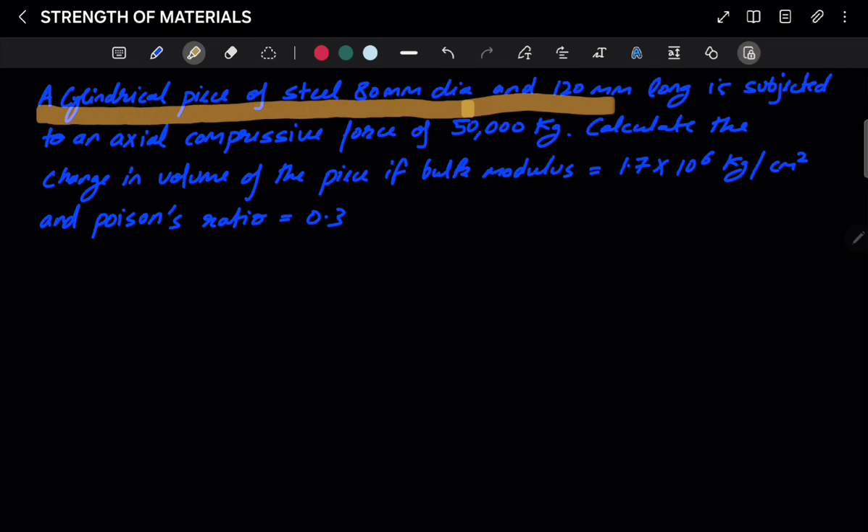80 mm dia and 120 mm long is subjected to an axial compressive force of 50,000 kg. Calculate the change in volume of the piece if bulk modulus is this and Poisson's ratio is given. So how will we be solving it? Let's start the question.

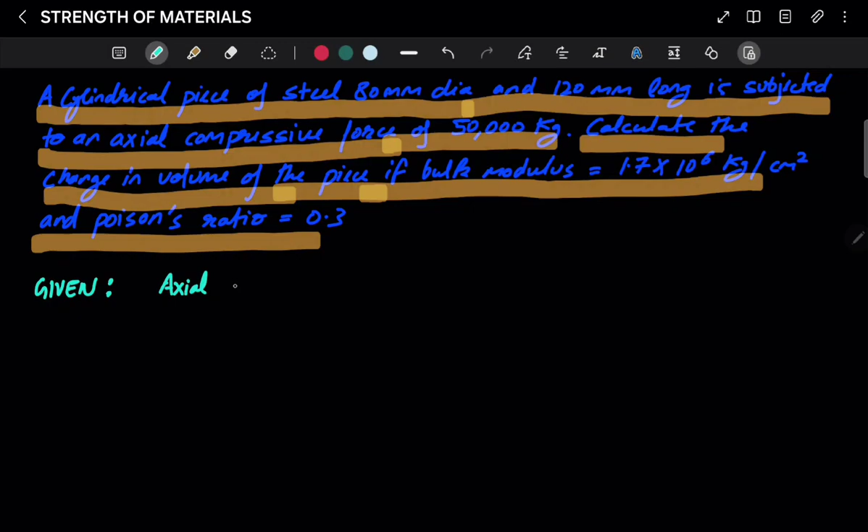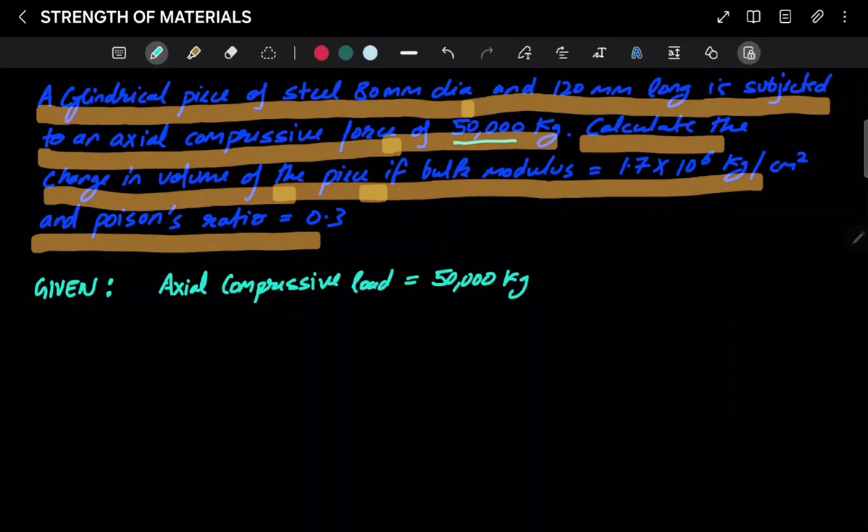So first, what is given to us? Axial compressive load, that is equal to 50,000 kg. Next, bulk modulus, that is K. K is given as 1.7 × 10^6 kg/cm², and Poisson's ratio mu, that is 0.3, and a cylindrical piece.

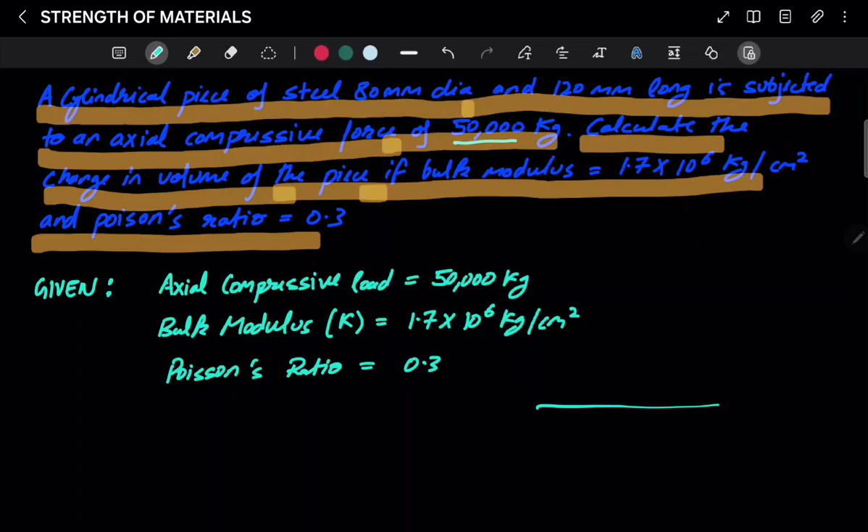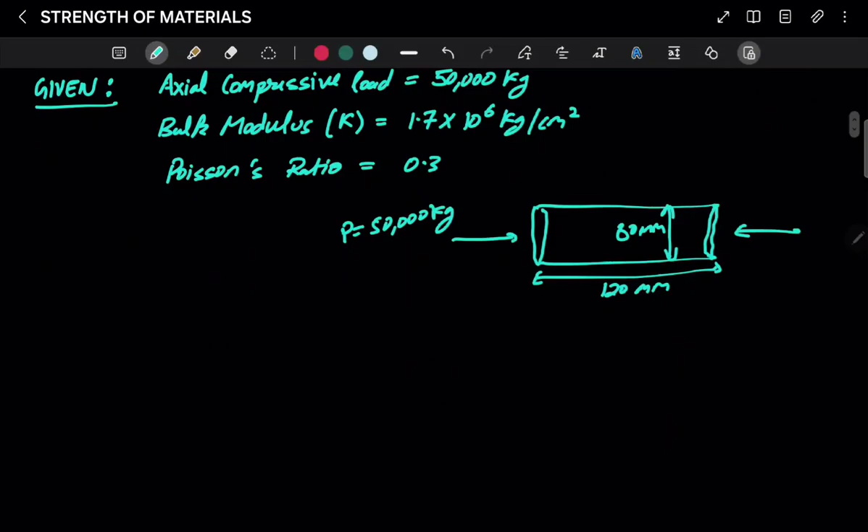So this is the cylindrical piece subjected to axial compression, where P is 50,000 kg, dia is 80 mm and 120 mm long. So now how will we start it? First we have to find the change in volume of the piece. The change in volume will be found by delta V by V.

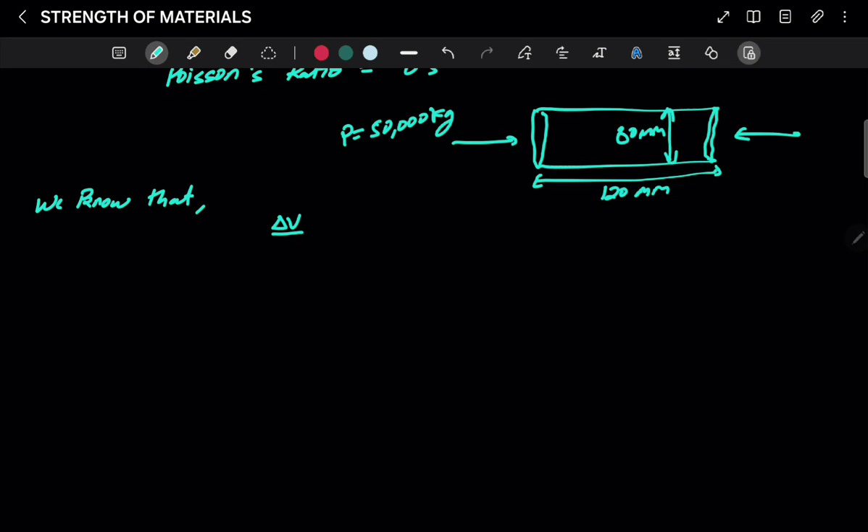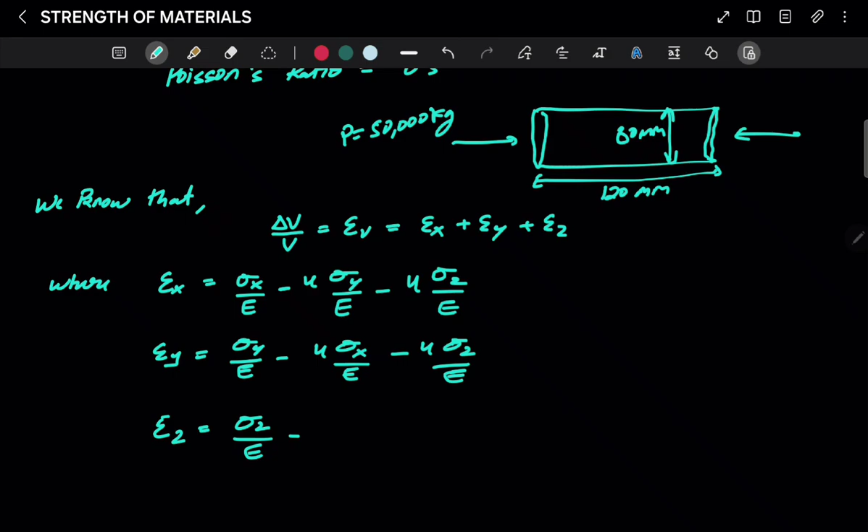So we know that delta V by V, that is volumetric strain, will be equal to Ex, Ey and Ez, where Ex is sigma x by E minus mu sigma y by E minus mu sigma z by E. Similarly, Ey will be sigma y by E minus mu sigma x by E minus mu sigma z by E, and Ez will be sigma z by E minus mu sigma x by E minus mu sigma y by E.

Now in our case, sigma y is 0 and sigma z is 0. So sigma x is equal to negative 50,000 divided by pi by 4 into, so this is in kg and here it is 80 mm, so we are taking 8 whole square, it will be in centimeter square. Solving this, we will get negative 995.2 kg/cm². Negative denotes compression.

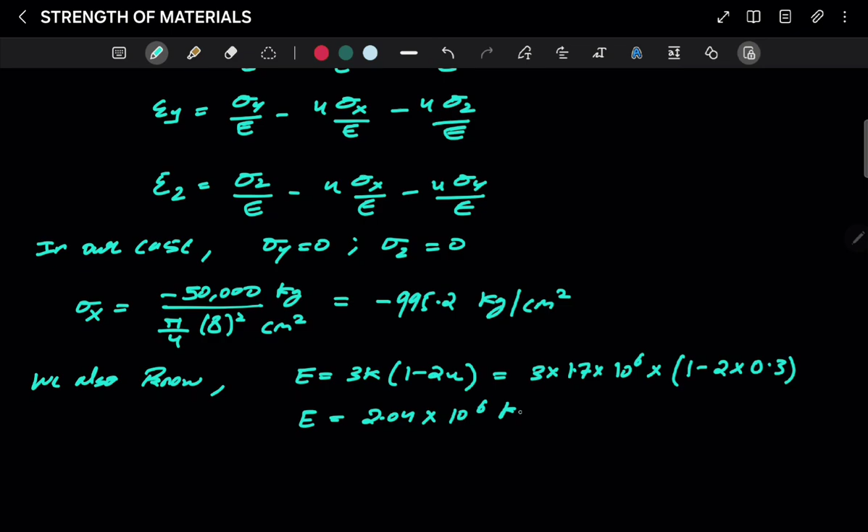Now we also know that E is equal to 3K(1 minus 2 mu). So here we get 3 into 1.7 × 10^6 into 1 minus 2 into mu, that is 0.3. Solving this, we get Young's modulus, that is 2.04 × 10^6 kg/cm². Now from this E we can find Ex, Ey and Ez, and then we can find delta V by V.

So Ex will be sigma x by E, and it will be equal to minus 995.2 divided by 2.04 × 10^6, and it will be minus 4.878 × 10^-4.

Similarly, we can find Ey. Here this will be 0 and this will be 0, so we get minus mu sigma x by E, and it will be equal to 0.3 into 4.878 × 10^-4, which equals 1.4635 × 10^-4. Now Ez will be the same, that is minus mu sigma x by E, so 1.4635 × 10^-4. Here positive denotes that it is in tension.

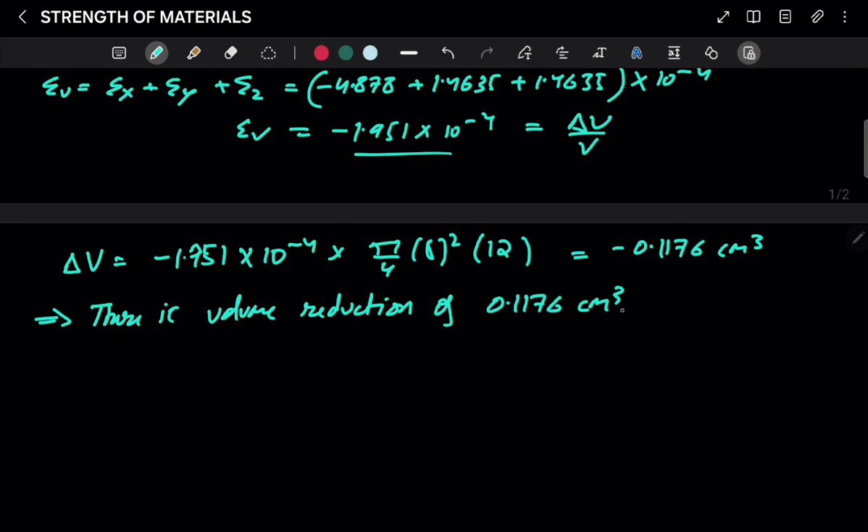So we can write that there is a volume reduction of 0.1176 cm³. So we have solved this question.